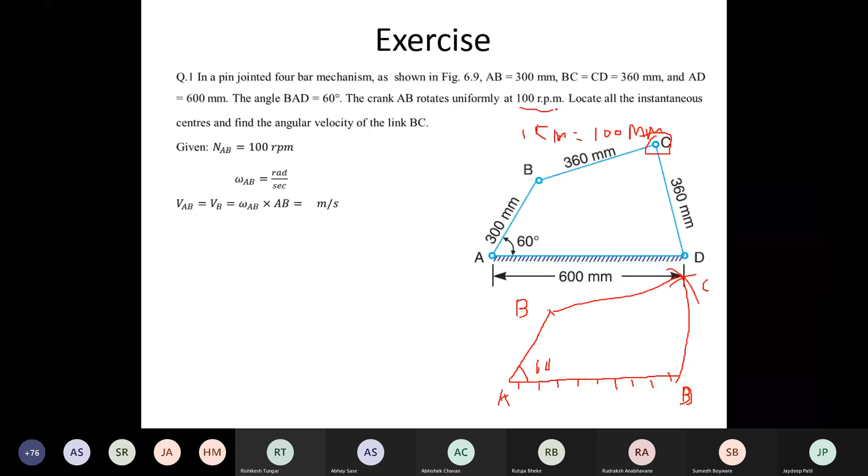Input link is your AB. The speed is given 100 rpm. Means when speed of AB is given, you have to find out omega AB. Omega AB कितना आएगा यहाँ पे? Omega is equal to, what is the formula? Omega is equal to 2 pi N upon 60. Correct?

Now tell me the answer. 10.47. 10.47 radian per second. Correct? Now this is the 10.47 radian per second. Once you get the omega AB, you can easily find out the velocity of B or velocity of AB.

You can either write down velocity AB or velocity B, because A is fixed. Now velocity B is equal to r into omega. Radius means the length of the link AB into omega AB. Omega AB is known here 10.47 into AB. The distance of AB is given 300 mm. You have to convert it into meter. Meter में कितना आएगा? 0.

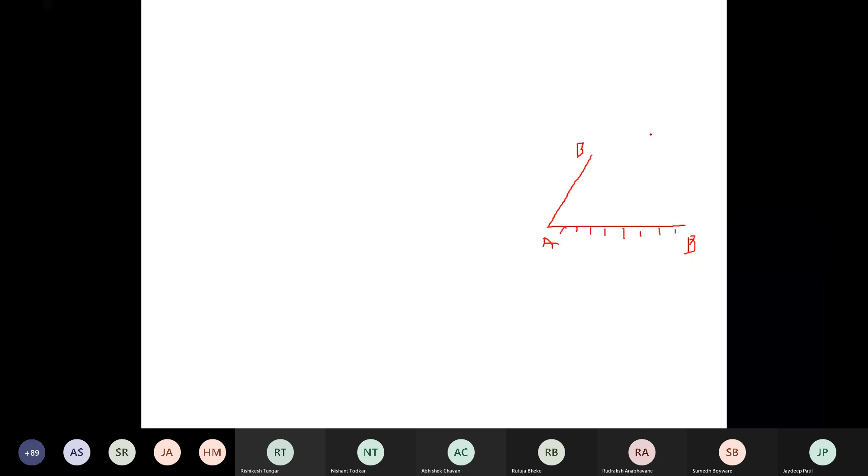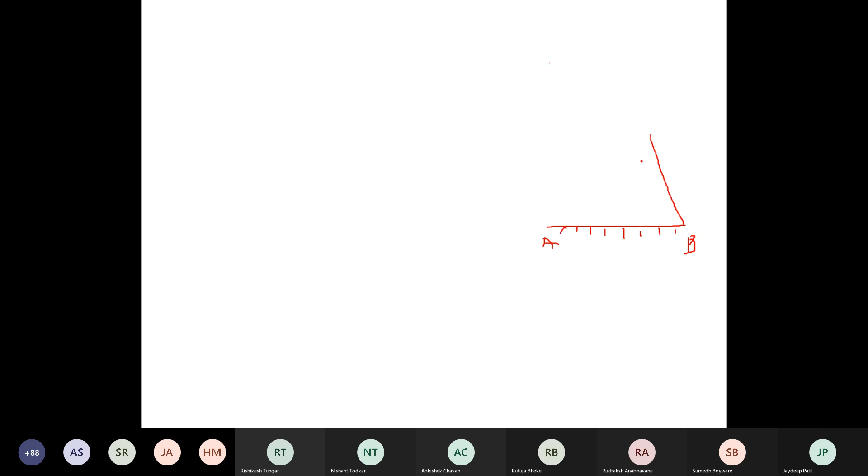Now this is the B and this is the C. Got it? Okay, sir. First step configuration diagram हो गया. Now we know the velocity of B. कितना है velocity of B? Velocity of B is your 3.14 meter per second.

Now next step, you have to mark the number of links in the given mechanism. Okay. Now you have to always give the first number to this link AD, which is fixed. Now next number second you have to give the input link. Now in that case, the speed of rotation in RPM of link AB is given here, but the direction of rotation is not given. If you see this problem, the crank AB rotates uniformly at 100 RPM, but in which direction, clockwise or anti-clockwise? It is not mentioned.

You have to consider it is rotated in clockwise direction. Okay. Suppose it is rotated in clockwise direction, means this link is your input link. You have to mark the number to this input link as 2. Next, third number for which link?

And the fourth number is your CD. Once you know the number of links in the given mechanism, you have to count them. These are the 4 number of links. You have to find out the next step, which is your capital N.

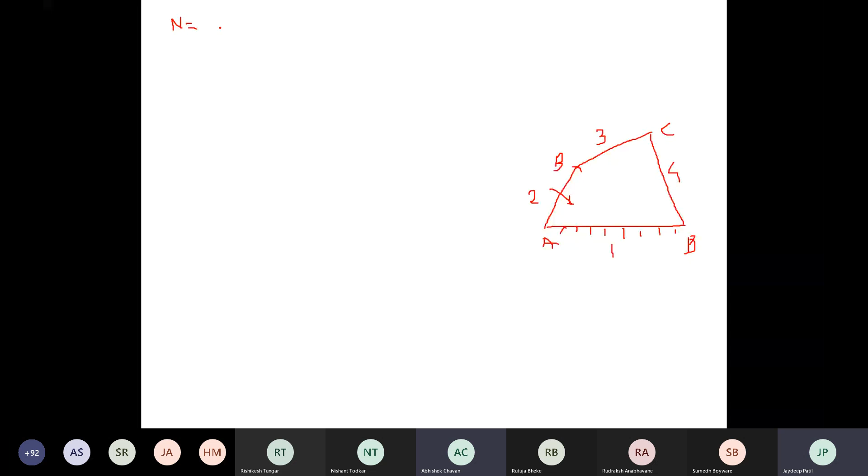What is this capital N? Capital N is the number of instantaneous centers. Correct. Number of ICRs. Now, what is the formula? N = n(n minus 1) upon 2.

Correct. N = n(n minus 1) divided by 2, where small n is the number of all links. The links in the mechanism are 4. What is the answer? 6. Correct. In the given mechanism there are 6 ICRs.

Now, what is the next step? List the ICRs in the mechanism. Correct, you have to make a list of ICRs in the given mechanism. There are 6, but which are the 6 ICRs? I have to make a list.

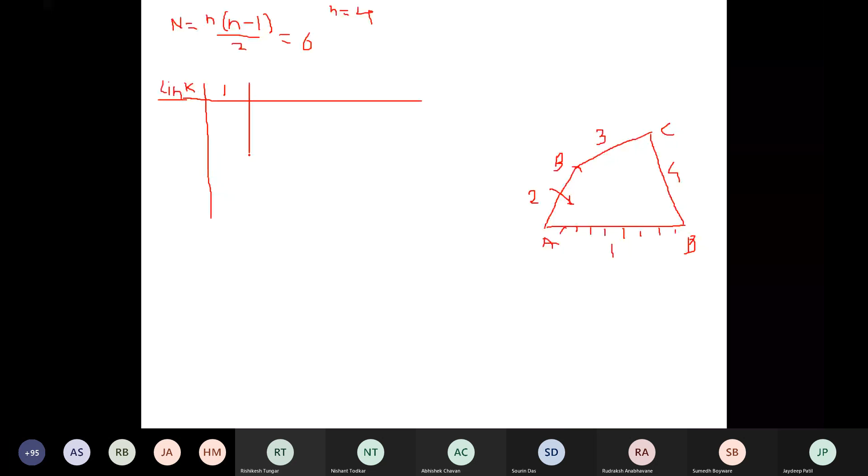In that case, you have to make columns. How many columns? 4 columns. Why 4 columns? 4 links, 4 columns. In the first row, you write down the links. There are 4 links, hence draw 4 columns: 1, 2, 3, 4. If there are 6 links in the given mechanism, you have to make 6 columns.

Next, in each column you have to write down the ICR of that link with respect to another link. For example, in the first column write I12, then I13, then I14. Someone asks how 3 came. You have to consider the relation of each and every link: ICR of 1 with respect to 2, 1 with respect to 3, 1 with respect to 4.

Yes, for each and every link. Now consider the second column. You have to write down the ICR of the second link with respect to the other links. What comes first? I21. Correct. I12 means I21, there is no difference, and we have already done it in the first column. Don't repeat. Then I23 and I24.

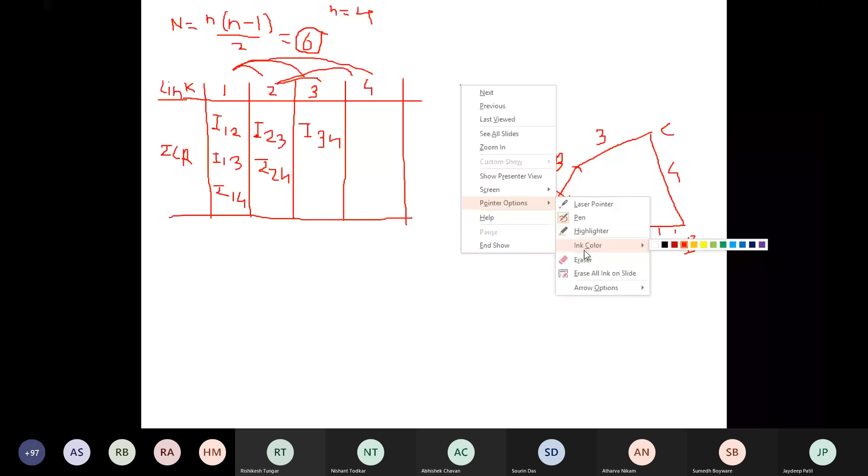What is the next step? You have to locate the ICR. Whatever number of ICRs there are, you have to locate them in the configuration diagram, the scaled diagram you have drawn, at the particular point. For example, take point A, the intersection of link 1 and 2. Which ICR do you get here? I12.

1 2. Correct. I12. Now come to the table and mark that ICR. Now next, see at the intersection of 1 and 4. I14. 1 4. Mark on the table. Next intersection at the 3. Oh, sorry, intersection at the B.

I3. Link 2 and 3 intersect. Here I23 or I32. I23. Now mark the table. Next at the C. I34. Correct. I34. Where is I34?

Now the two ICRs are remaining. Which are the two ICRs remaining? I13, I24. Correct. I13, I24. Now I12, I14, I23, I34. These are the fixed and permanent ICRs. You have to mark them by inspection.

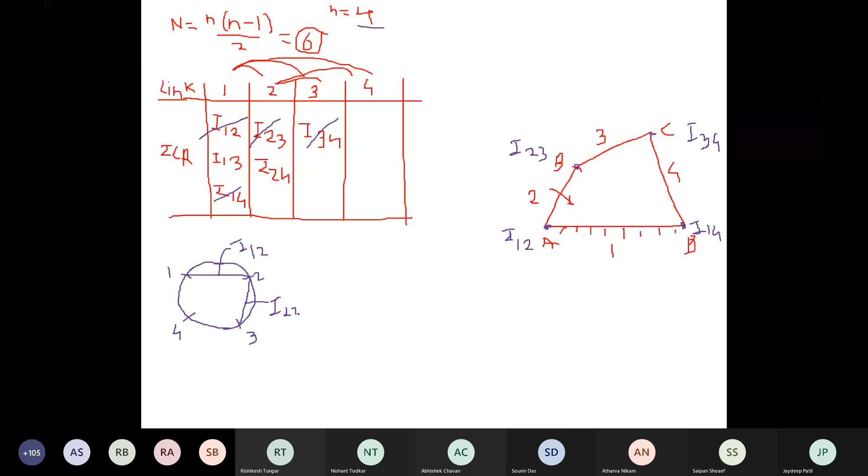Suppose see in the table I12. I12 means intersection of 1 and 2. You have to join this line I12. What this line says is your ICR I12. Similarly, you have to join 2, 3. What this line says, I23. Next, I34. Is it right? Yes. And I14. Yes. Got it? Did everyone understand till here?

How are the arcs made, by measurement or freehand? They are not arcs in the circle with 1 2 3 4. Now it is a straight line. You have to join it freehand. Randomly, anywhere on the circumference of the circle you have to mark points equal to the number of links. Suppose 6, then mark 6 points. And you have to join them, but only those for which I found the ICR, because 1 and 2 points are the links. I12 is the intersection of 1 and 2. If I join 1 and 2, you will get a straight line, and the meaning of that straight line is your ICR I12.

Next, you have to find the ICR I13 by Kennedy's theorem. I will write here separately I13. How will we get ICR I13? It is a point, and you will get it as the intersection of two lines. Here there will be one line and here another line. Now this is line number 1 and this is line number 2. Where these two lines meet, that point is your I13.

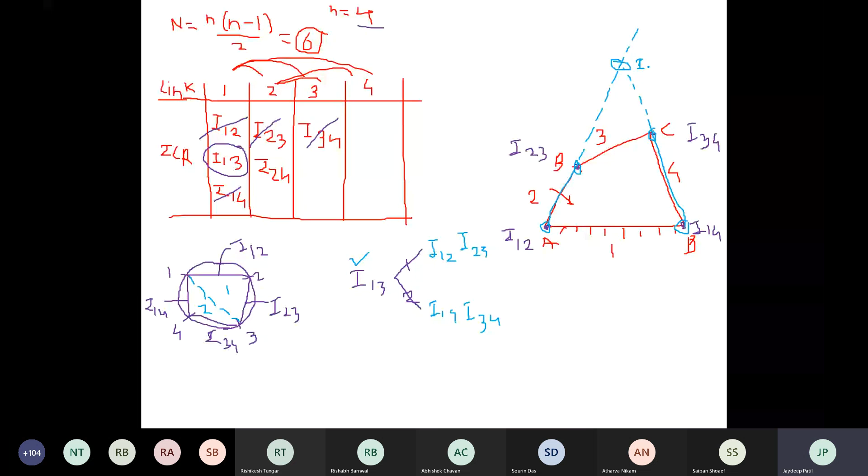Which point is this? I13. Correct. You will get here I13. Okay. Got it, all of you?

Sir, how do we get I13 here? In the circle, you draw the diagonal of 1 and 3 and find the 1 and 3. Now I have to find out the unknown ones; the earlier ones I joined with solid lines. Those are the known. Unknown are I13 and I24. First of all, I will find out the I13, which is required. Okay, suppose I13, I will join this I13. Line joining I13 makes 2 adjacent triangles.

If it does not make 2 adjacent triangles, you have to take the next one, 2 and 4. Okay, make 2 adjacent triangles. Now you have to consider it and do this. Once an adjacent triangle is formed, you will get 2 points for the straight line. From the second triangle, another straight line. You have to extend it. You will get the intersection point. Okay, I will explain the second one.

Now, see the next point is your I24. You have to find out the I24. Again, it is the intersection of 2 lines. Again, you will make here the 2 triangles. Now join first of all 2 and 4 in this circle. Now the line joining 2, 4 makes 2 adjacent triangles. Now this is the first and this is the second. Consider the first triangle and tell me the 2 points. I14, I12. And consider the second triangle and tell me the 2 points. I34, I23.

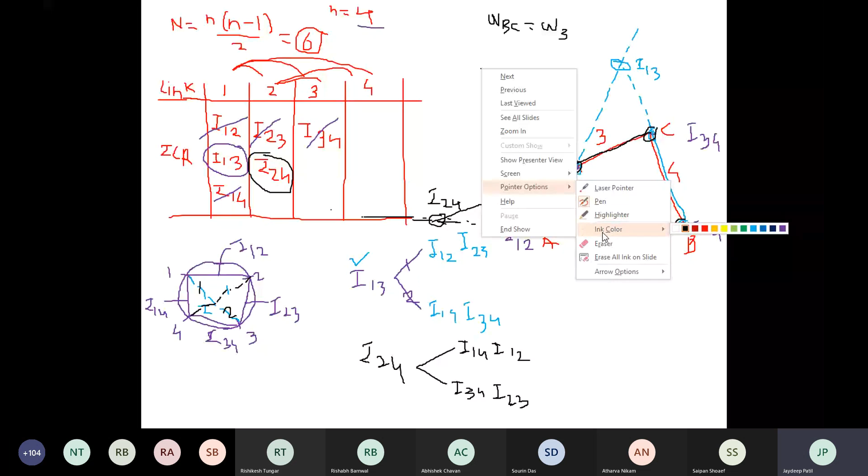Now 3 is connected to which link? 4 and 2. Okay. We know in the given problem, the input link is given. We know the angular velocity of which link? Link AB. Omega AB. Omega AB means, tell me in number. 2. Omega 2. Now tell me the value. 10 point.

Omega 2 is 10.47. Okay. Omega 2 is 10.47. Omega 3 you have to find out.

Now in the previous lecture I have given the formula. What is the formula? Omega x upon omega y is equal to I1y Ixy upon I1x Ixy. Correct. Omega x upon omega y is equal to I1y, I1 with respect to the denominator of the left hand side, and Ixy, numerator and denominator, divided by I1x, where 1 denotes the fixed link, with respect to the numerator of the left hand side, and Ixy. Okay. Now this is the standard formula.

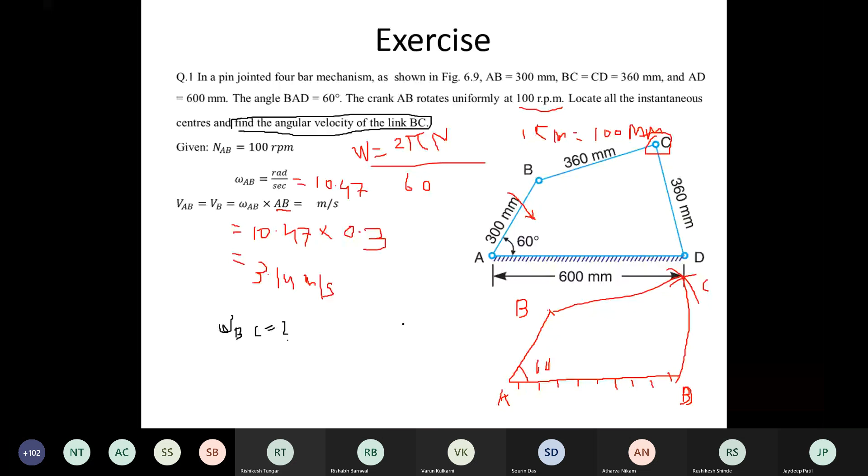सर आंसर क्या आ रहा है? आपका आंसर आ रहा है 6 point... 132 आ रहा है. 1 minute, I will tell you the correct answer. 6.28 is the correct answer. Omega BC is 6.28. और velocity of C? Our velocity is 2.2, 2.5 like this. सर 2.32 आया है सर. हाँ चलेगा, कुछ प्रॉब्लम नहीं. 2 भी आया तो भी चलेगा, 1.8 आया तो भी चलेगा.

ओके. हेलो सर, VC कैलकुलेट करते टाइम जो I13C है उसको 0.360 क्यों लिया? अरे मेजर किया ना. I13C means what? See in the figure. This is the measurement. 0.360 क्यों? Now you have to convert it into meter ना. This is in mm. ओके ओके ओके. सर 360 डायरेक्टली लिया तो चलेगा? डायरेक्ट कैसे लेंगे? यू हैव टू मेजर इट. डायरेक्ट लिया तो आंसर मीटर पर आएगा या mm पर आएगा? mm पर आएगा ना सर. हाँ ओके. हो गया? Okay, done all of you?

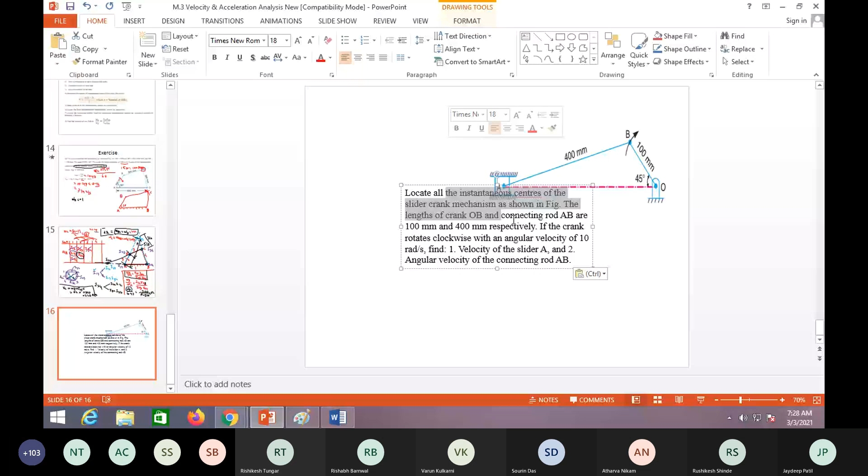Okay, now what is the problem? Locate all the ICRs of the slider crank mechanism shown in the figure. The length of the crank OB is given here. How much? 100 mm. OB is given as 100 mm and the connecting rod AB is given here as 400 mm. If the crank rotates clockwise, the rotation of the crank OB is given here with angular velocity 10 radian per second. Directly the angular velocity is given. We have to find the velocity of slider A and the angular velocity of connecting rod AB.

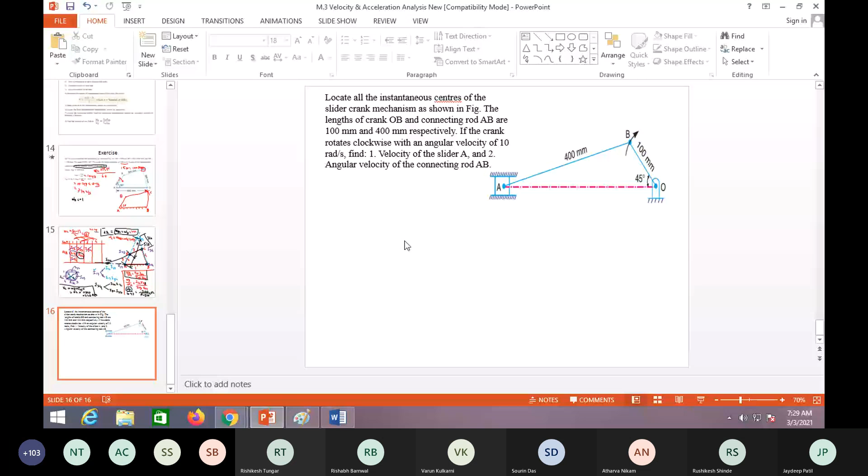Okay. Have you drawn this problem or not? Sir, how to draw this? Yeah, I will explain again. First of all, you have to draw a horizontal dotted line. Now take anywhere on this line a point O, which is fixed. Next, what to do? At an angle of 45 degrees, you have to draw OB. Correct? 45 degrees, you have to draw OB. And next, you can find the point A.

Take the distance 400 mm in the compass. You have to use the scale here. What scale have you taken? 1 centimeter is equal to how much? 50 mm. Okay, it will become very small. Fine. 50 mm means you have to draw OB 2 centimeter and AB how much? 8 centimeter. Take the distance 8 centimeter in the compass and draw an arc. Where this arc intersects the dotted line, you will get the point A. Got it? And draw the slider here. This is the point A.

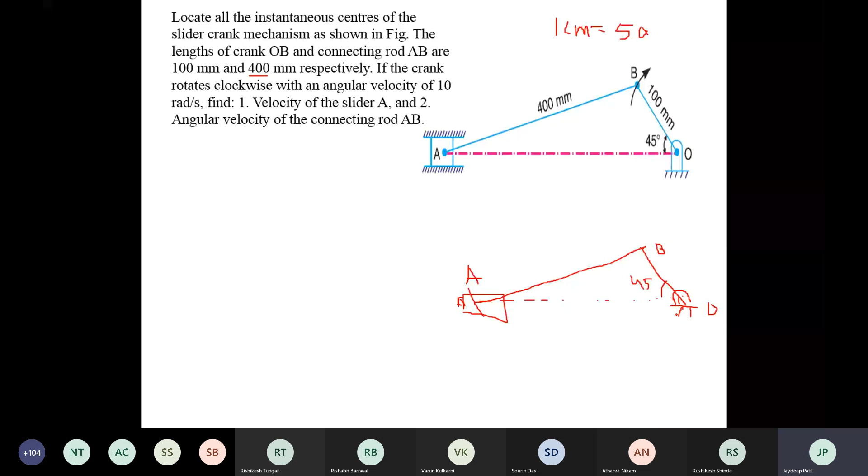Okay. Now you have to find the velocity. The input link is given and it is rotated in the clockwise direction. Now directly omega OB is given here. Omega OB, how much? The input link is your OB. It rotates with an angular velocity of 10 radian per second. Correct? Is it right? Yes, sir. 10 radian per second.

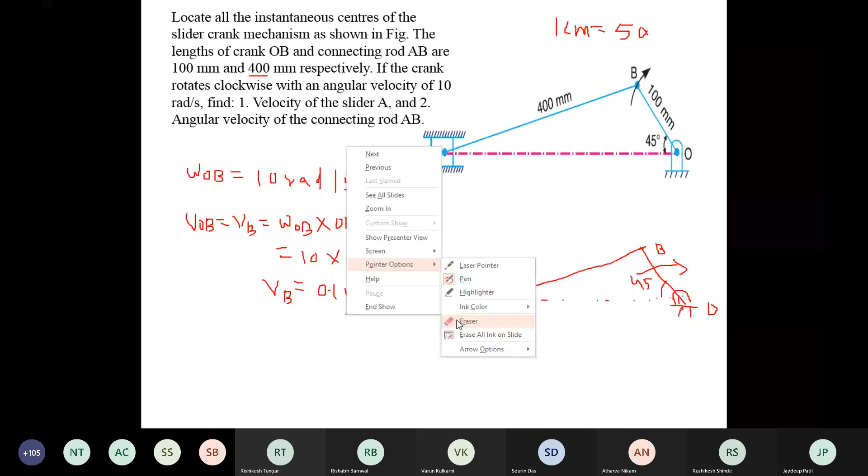Yeah. Now, how can we find the velocity of B or velocity OB? You can write velocity OB or velocity B, because the velocity at point O is 0, it is fixed. How can we find the velocity OB? It is equal to omega OB into OB, the distance OB. Now, here omega OB is given as 10, into OB is given here as 100 mm, which means 0.1 meter. How much does it come to? What is the velocity? 1 meter per second. 1 meter per second is the velocity of B.

Okay. OB is 0.1. Now the distance OB is given here. See in the figure, 100 mm is already given. We have to convert it into meters. Converted into meters. Okay. Did you understand or not? Hello. Yes, sir.

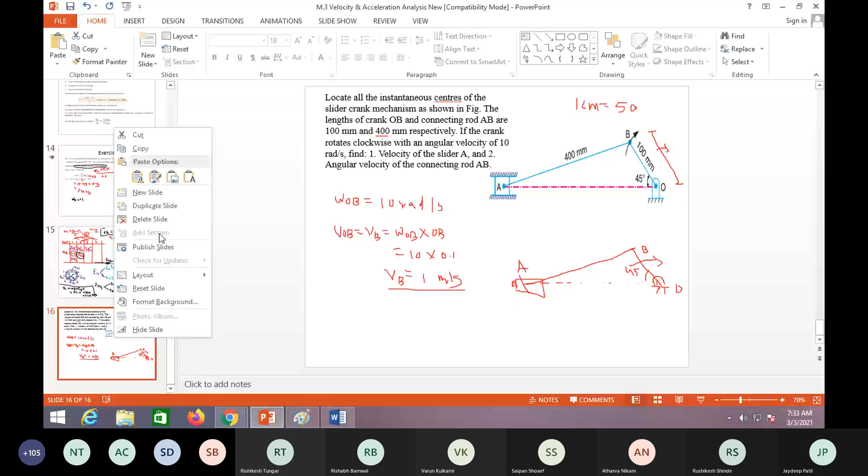Okay, now you have to solve this problem. What do you have to do? First of all, you have to draw the configuration diagram. I will repeat this. OB is drawn at 45 degrees, and here is the A. A reciprocates inside the guide, and it rotates in the clockwise direction. Now this is the configuration diagram.

You understand? Now, next step: draw the configuration diagram. Second, find out the velocity of the input link, omega. Already OB is given here. How much? Omega OB is given as 10, right? Yes, 10 radian per second.

Now next, you have to mark the number of links in the given mechanism. First number goes to the fixed link, and second number to the input link. This mechanism is fixed at O, and also at the slider at the end. Wherever there are fixed points, directly give number 1. So I will mark 1 here.

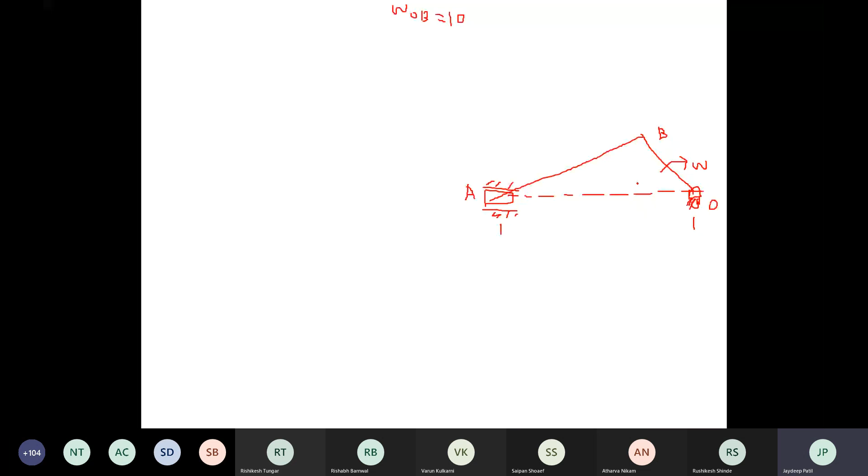I have to give the next number to the input link, correct? Which is the input link here? OB, this one. OB is the input link, so it is 2. Now OB is connected to AB. AB is the third. Then AB is connected to slider A. Now this is your fourth link. So here 1, this is 2, this is 3, this is 4.

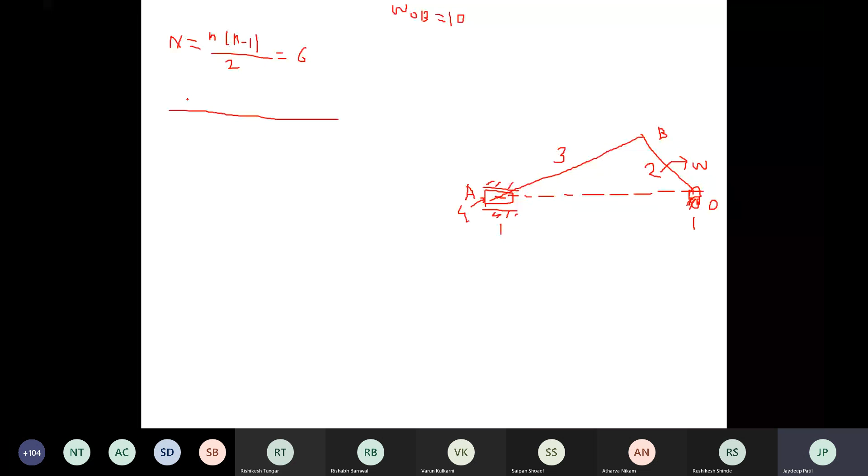Correct? Once you get the number of links, you have to find out the number of ICRs. Same, n is equal to what? n into bracket n minus 1, upon 2. How many are coming? Number of ICRs are 6. Once you get the number of ICRs, you have to make a table of ICRs. On the first row, you have to mark the number of links 1, 2, 3, and 4.

Quickly, what will come in the first column? I 1 2, correct. Second, I 1 3. I 1 4. Same here, I 2 3. Then I 2 4. And the last one is I 3 4. Correct. Same table you will get here. Okay, understand?

I have to mark the ICRs in the given mechanism. Now tell me, at O, which ICR will you get here? At O, the intersection of first and which link? I 1 2. Next, at B, I 2 3.

Then at A, now here is the A point. I mark it here, and I extended it here. Now at this point, which ICR will you get? I 3 4, correct. 3 and 4 is the slider; the third link is connected to the slider. And then one more ICR is remaining here: ICR of 1 4, the ICR of the slider with respect to link 1.

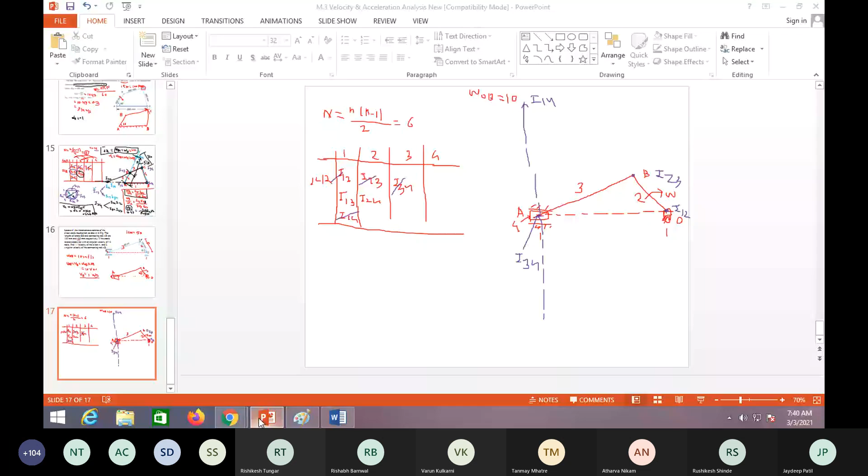Okay, understood up to here? Hello? Yes sir, so for I 1 4, we took the location of the ICR as a point. It is the point where you have to locate the ICR. When two links intersect, you mark the ICR of those links at the intersection point or the joint. Second, suppose slider A reciprocates inside the guide. The ICR of that slider with respect to the fixed link or guide is perpendicular to the motion of the slider. Here the motion of the slider is horizontal, so you draw the ICR of that slider with respect to the fixed link vertically. That means it will be at infinity. Okay sir. Now next, which ICR do you have to find out?

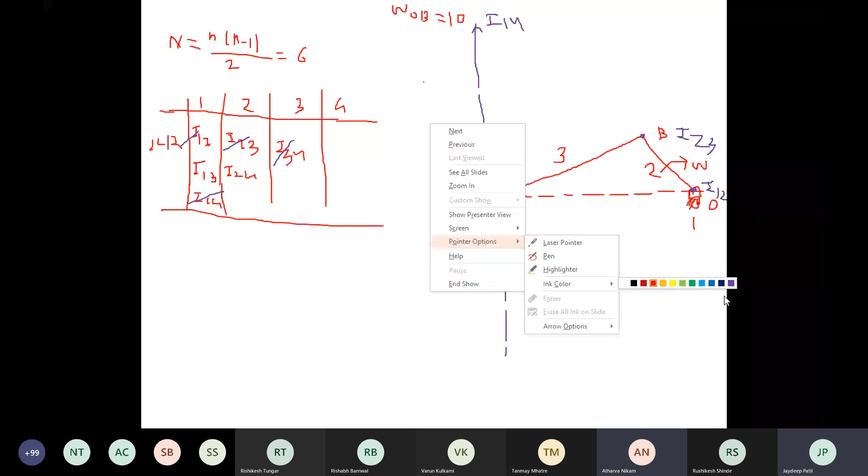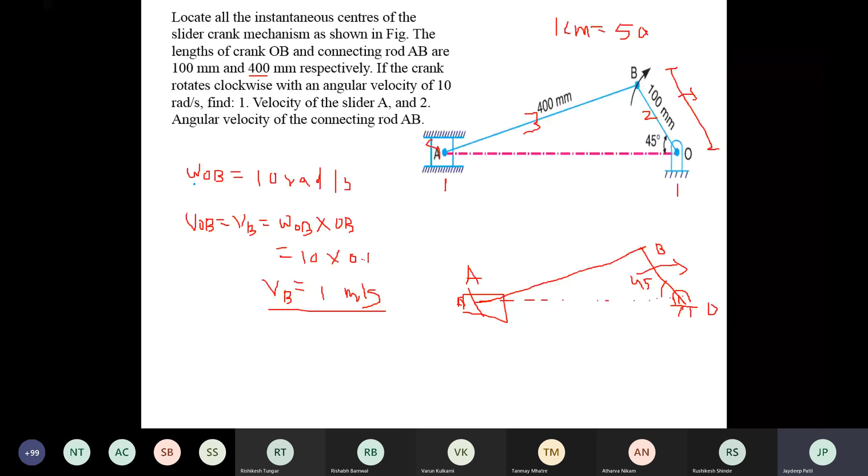I13 and I24 find out करना है. Now see here, there is no need to find out all the ICRs in the given mechanism, only the required ones. If you read the problem, you have to find out here the velocity of slider A and the angular velocity of AB.

Means you have to find out omega AB, means omega 3. And next you have to find out velocity A. Velocity A is a slider. Correct? Means you have to find out the omega 3 only. Correct?

Or I understand? Hello, Das. हाँ sir.

है ना? You have to find out omega 3. Now the angular velocity of input link is given. Omega OB is given, means omega 2 is given. You have to find out omega 3. If you write here the formula to find out omega 3, what is the formula? Omega 3 upon omega 2 is equal to I.

What is the formula? I12 I23 divided by I13 I23, correct? Now see the right hand side of this equation. Which ICRs are known here? I12 है. Here is I12, correct? This one. And I23 is here. Which one is unknown? I13. Correct. Means you have to find out here I13 only by using the Kennedy's theorem.

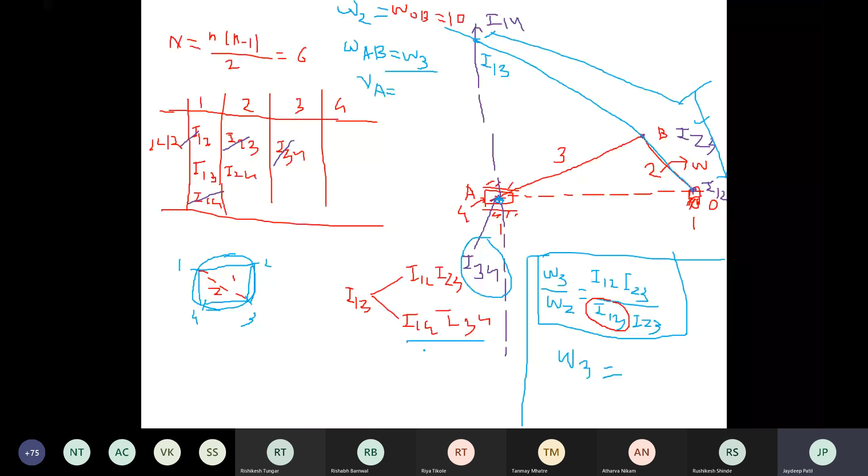Yes. Yes, sir. Now next you have to find out the velocity A. Velocity A कैसे निकालेंगे? Velocity A is equal to omega. Which omega you have to consider here? 2 or 3? A is a point on link 2 or 3? 3. So omega 3 into radius क्या आएगा? Velocity of A find out करना है. Means consider the third number link. Now tell me the ICR of third number link.

The link number 3 turns with respect to which center? 1, 3. I13. Correct? I13 into distance, क्या है radius के लिए? I13 to which distance? A. Now this is the radius. Okay? Omega 3 you will get by using this formula. I13 to A distance is this one. Okay, put this distance in this.

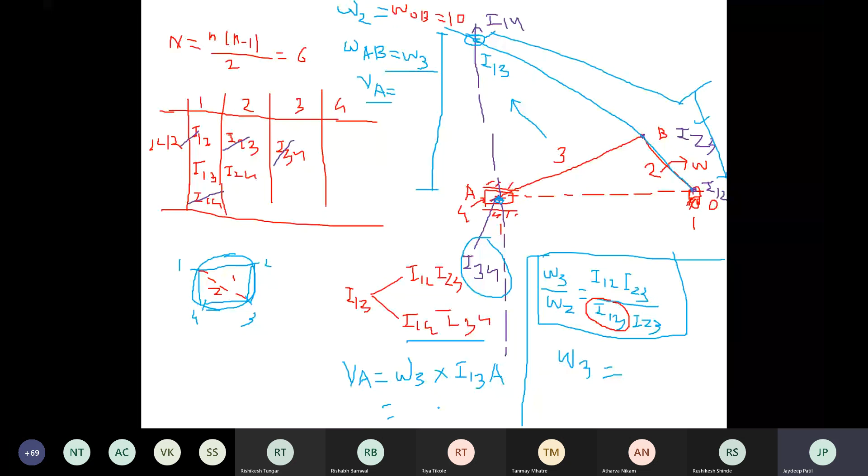समझ में आ रहा है कि नहीं? Hello, sir.